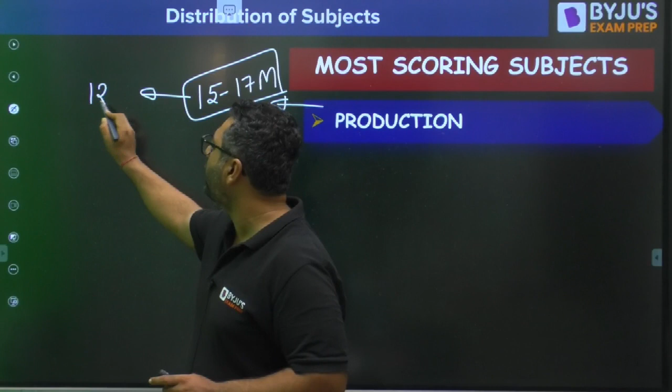And my dear, why I said scoring? Because scoring 12 out of 15 is very, very easy for any common general average student, because it is not having much tricky things in all the chapters. Like there are chapters like welding, casting, sheet metal operations, metal cutting, where things are fixed. Like the question will be coming from the Taylor tool life equation, you have to solve like that. So they are majorly fixed types. That is why it is more scoring, and this should be your first preference when you are at the final stage of preparation. You must give more attention to this subject.

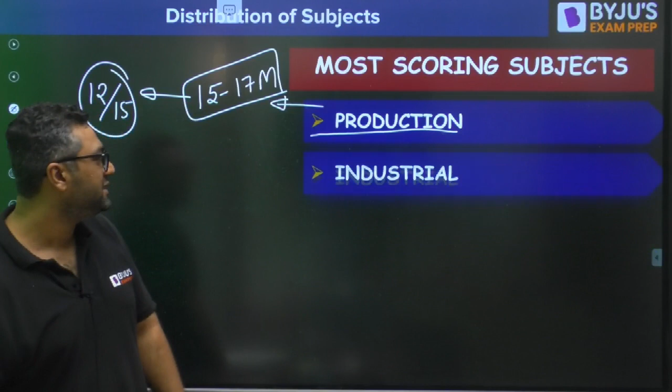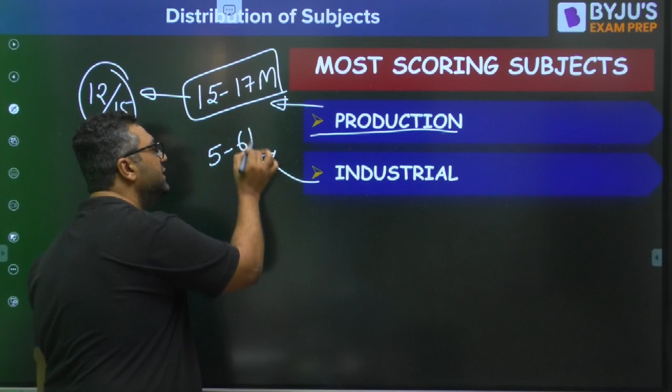Second, my dear, is industrial engineering. It is scoring because it is not related with any of the technical subjects. It is majorly a management based subject and very easy to deal with, very easy to tackle. Here also some ways of doing are there. Weightage is around 5 to 6 marks. Sometimes it reaches 8 marks as well, but it is very easy to score 100% marks in industrial.

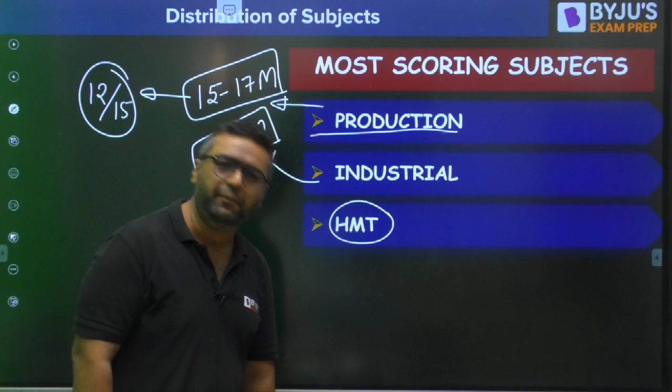Then, my dear, HMT - heat and mass transfer. In the convection part, a small boundary layer theory concept of fluid mechanics is required. Otherwise, this subject is also independent of any other subject. Here also simple formula based questions are coming, although it is a technical one, but still it is very scoring. 5 to 6 is the general weightage, but it has been seen that in some years, like 2021 or 22, it came for 9 marks as well. So sometimes the weightage increases, but whatever, 5 to 6 is also decent because it's 10% of the technical.

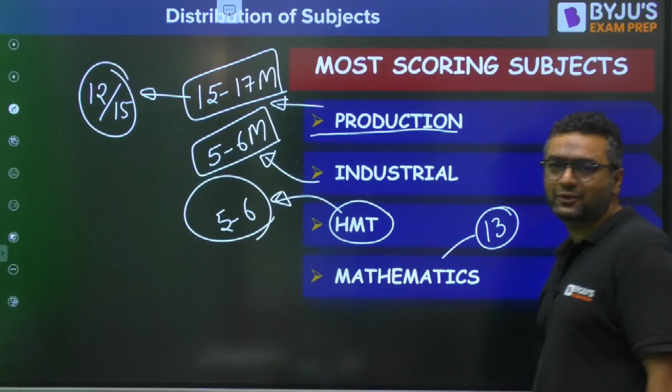Then, my dear, after these three technical subjects, the next scoring subject is engineering mathematics. The weightage of that is 13 marks. And my dear, it is also very scoring, and I feel this is majorly your 12th class mathematics, so you can very easily score 10, 11 marks out of these 13.

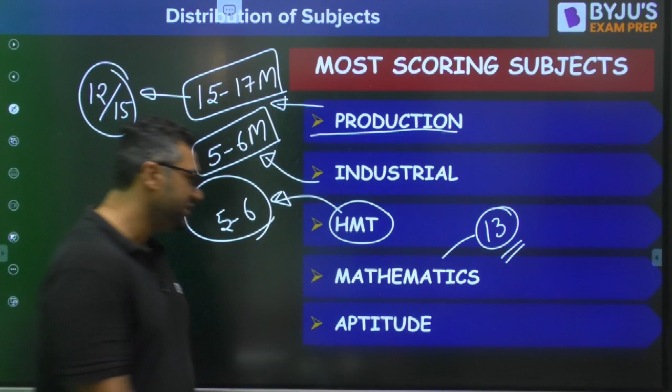Next is the aptitude part, which has a weightage of 15 marks. And my dear, out of 15, 11 marks are very easy because they are related to numerical aptitude. The rest 4 are from verbal aptitude, where students may feel some difficulties. So if you see these subjects, very easily you can cross the 50 marks mark. Meaning out of 100, 50 score can very easily be achieved by these subjects only. And my dear, these are my first priority based subjects. If anybody is starting from October, I would recommend them to go with only these subjects very nicely, so that you can very easily cross the 50 marks.

Okay, then my dear, now I will also be telling about the students who are starting preparing for 2025, because they would be looking for the entire syllabus. So for them, I am going with two classifications: one is fundamental, the other is application. So my dear, when we talk about fundamental subjects, they should be done first. They are interesting, and also application subjects are based on them. So without these, you cannot go ahead.

That is one more thing. So in fundamental subjects, the very first thing we are having engineering mechanics. You also study major part of this in the 11th class mechanics. Major parts like kinematics, Newton's laws of motion, work, power, energy, collision, rotation. So whatever you study till that point, it is same as the syllabus of engineering mechanics.

2-3 topics extra like we have here trusses and frames, virtual work, right? Those 2-3 things are extra. Otherwise, the same friction which you study there is there. So that is why this is the fundamental subject.

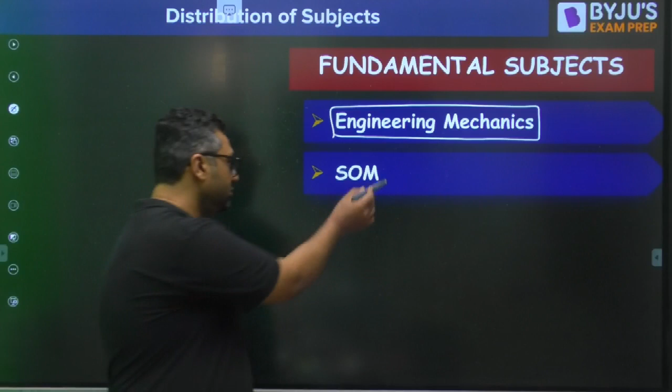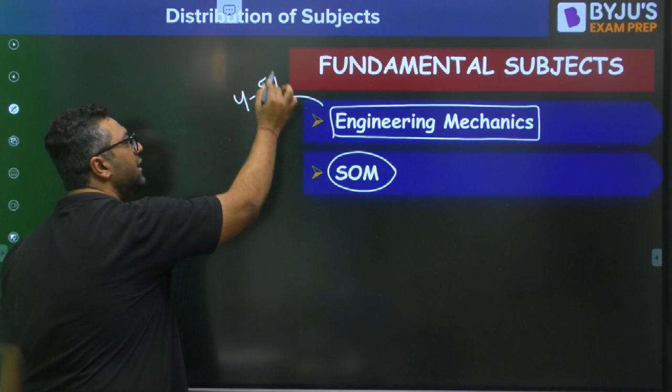Then strength of material. Strength of material is second fundamental subject. So if you ask me what are the application subjects, it depends on them and their weightage. Weightage of engineering mechanics is 4 to 5 marks. And theory of machine is the subject which is based on this.

Theory of machine is also a fundamental subject, but it is using some part of engineering mechanics. Then, strength of material for mechanical is coming for 8 to 10 marks. Very high weightage subject, fundamental ones. Metal forming and machine design are two topics which are totally depending on strength of material.

Then we are going to have basic thermodynamics. You can expect around 4 to 5 marks. And when we talk about that, there are some application subjects, RAC, IC engine, power plant, they are depending on them. These are the subjects from where you should start your preparation, because they are very interesting. They will make your interest into the studies.

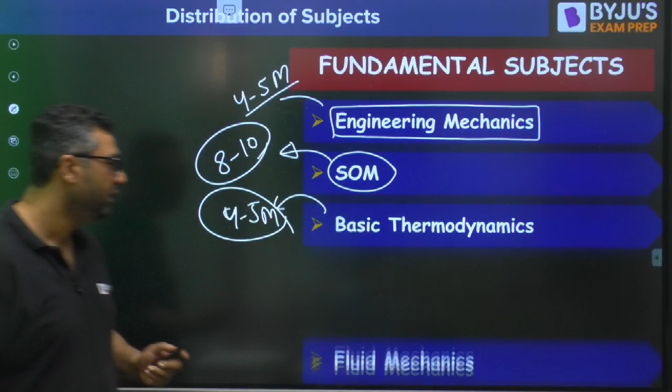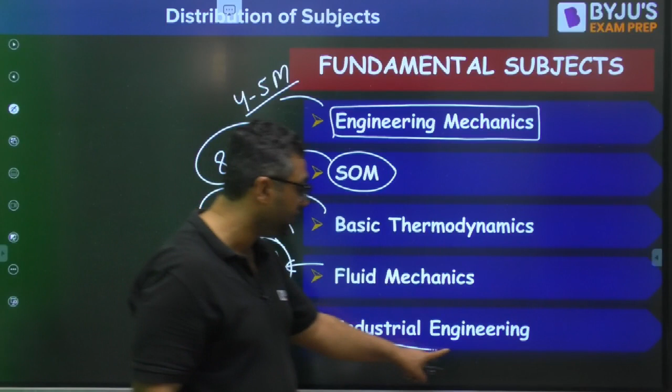Then, fluid mechanics is the next fundamental subject, and guys, this is also having a weightage of 6 to 8 marks once again. And next fundamental is industrial, because it has no relation with other technical subjects. That's why it is also in the fundamental category. Other than that, you can add engineering mathematics and aptitude as well.

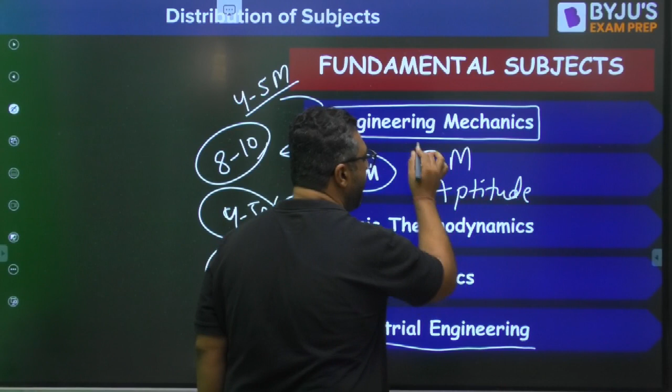So these 5 subjects are the fundamental subjects, and after that only you should go to the application part of theirs. Then what is the application part? Let us see that. In application subjects, the first we have machine design, which is coming for 4 to 5 marks, but it is totally depending on the strength of material. Without strength of material, you cannot do machine design.

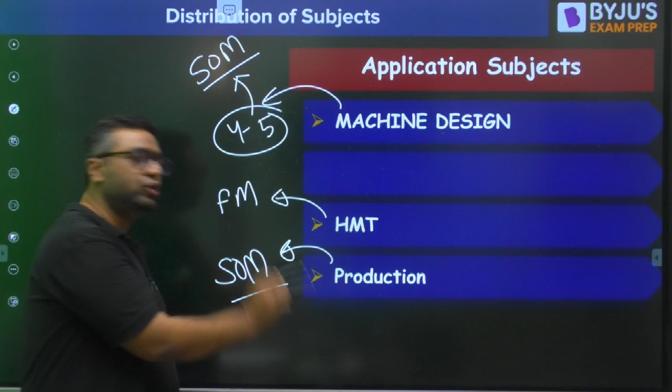Second application subject is related to heat and mass transfer. As I said, slight utilization of fluid mechanics is there in this subject. Then we are having the production part. Some part of strength of material is going to be utilized in this. And guys, fluid machinery would be using the fluid mechanics concept.

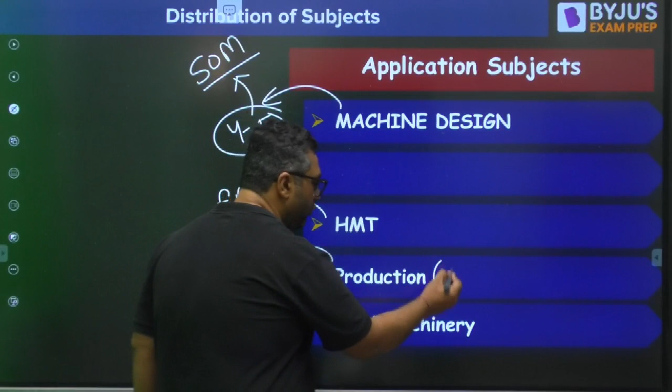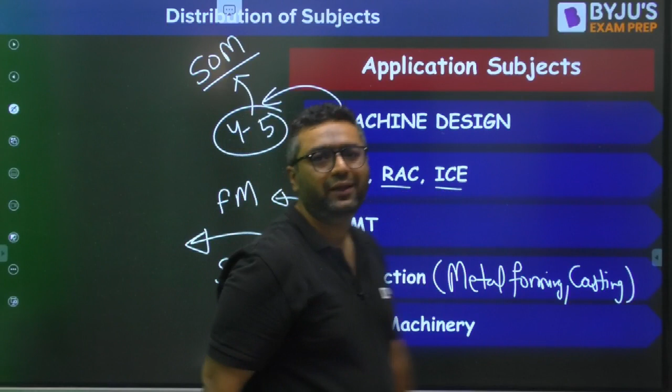Only the metal forming part is using the concept of strength of materials, and the casting part is using the concept of Bernoulli equation. So for other topics, you can take them as fundamental only. Then, power plant, RAC, IC engine, they are coming for 5 marks in GATE, and they are once again totally depending on basic thermodynamics.

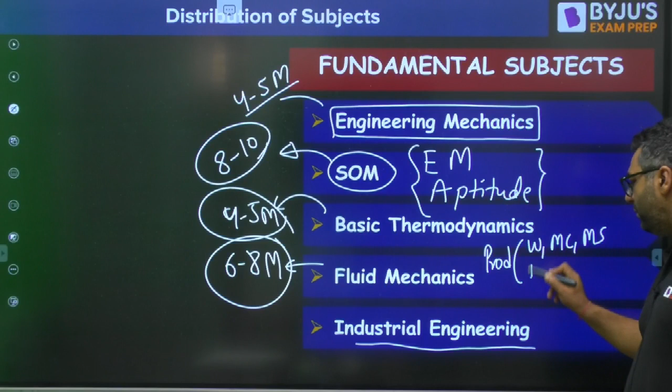So guys, I feel I have divided the entire syllabus in a nice manner. So you can add one thing in this, that is production. Which topics? Welding, metal cutting, material science, metrology and inspection, and computer integrated manufacturing. Other than that, you can see these are coming in the application subjects. So these are the beautiful lists which are very, very important, and I have given you.

So if a student is preparing for GATE 24, his major focus should be on the scoring subjects. And if a student is preparing for GATE 25, he should start with the fundamental subjects. In fundamental, keep the production at the last. Why? Because production generally is, students do not feel it is very interesting. But it is not using much concepts of the other subjects, like only casting and forming uses SOM and fluid mechanics concepts.